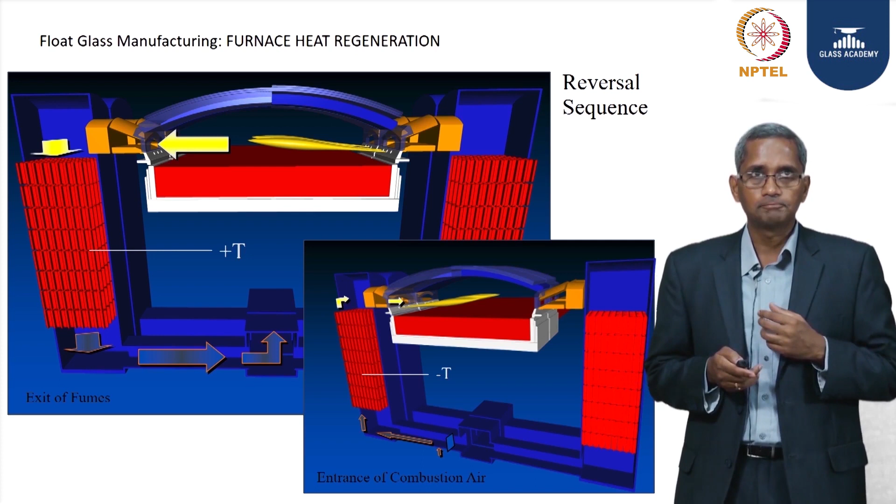This is another picture to clearly understand how the combustion happens. The furnace is the one in the middle. The two towers that you see, right and left, are the regenerators. In this picture, the firing is happening from the right hand side. The flue gas is going through the regenerators, and the waste gas is going out, the reddish color on the left hand side regenerator top. When it goes out into the chimney, the color slowly turns blue, which means the temperatures have gone down to about 400-450 degrees centigrade.

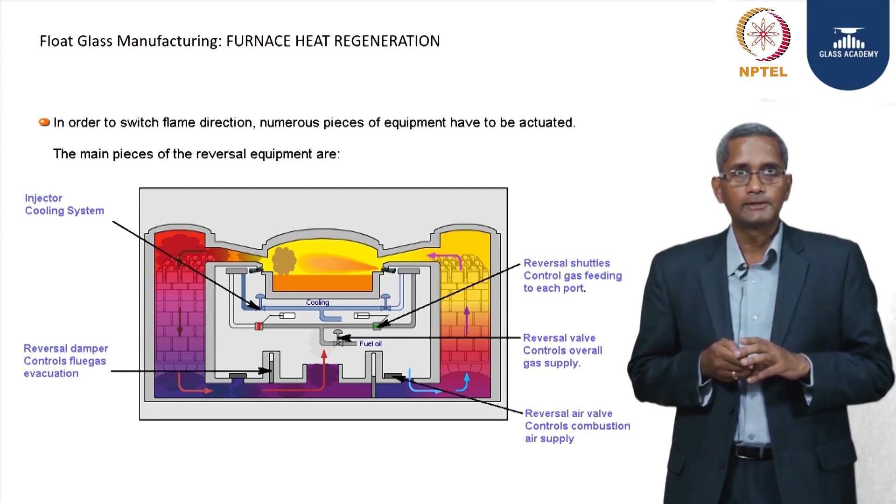Okay, so now having melted the glass efficiently, because we are regenerating the heat, and having homogeneously brought the glass together in the neck, we have reduced the temperature in the working end to 1100 degrees centigrade, and this is a very critical temperature. This is the temperature at which we can form the glass. The forming operation, like in most industries, works on the glass to form it to the shape that we want. In glass manufacturing, we are talking about the width and the thickness. That is formed in the float bath.

In the initial introduction, I talked about the float bath having molten tin. Why molten tin? When Pilkington brothers invented this process in 1957, till then the glass was being drawn vertically up, and the glass was trying to follow gravity and sag, even though you had a good set of rollers on the sides taking the glass vertically up, the Fourcault and Colburn processes since 1913. The optical properties were not as good because the glass tended to sag and become wavy.

And so Pilkington brothers thought, what is the best way to make the glass flat? All of us know the flattest surface we can get on earth is a liquid surface. So they thought, how about two immiscible liquids, like oil on top of water? If the glass can float on top of something molten, then we could set the thickness and width while the glass is floating, and that could give a very flat surface. This idea propelled what we now know as the float glass manufacturing process. They found that it is possible, and for that we need three very important properties for the medium, or rather the substrate, on top of which the molten glass can float.

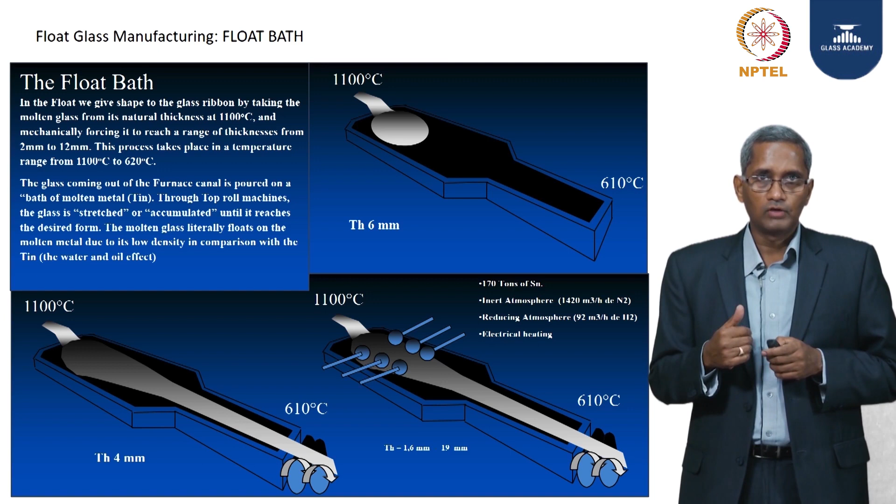And after that, it is a C zone, in which again cold air, a mass quantity of air, is being passed to have a little bit of faster rate of cooling, and in the D zone, it is preheated air, but direct cooling with passing of the air in contact with the glass, not through the ducts as it is done in A, B and C zones. And in F zones, it is done with mass air, cold air directly onto the glass to cool at a faster rate.

Now, let us talk a little bit about what this annealing range of the glass is. The glass that we make, as you saw in the raw materials, is using silica, soda, as well as calcium, magnesium, etc. So, the type of glass that we make comes under the category called soda lime silica glass. For soda lime silica glass, the annealing range is 480 to 540 degrees centigrade, which means above 540 degrees centigrade, the glass is said to be in a plastic state, which means whatever you try to do to the glass, nudge it, poke it, it does not take any stress, because the glass is plastic, it gets back to its original shape.

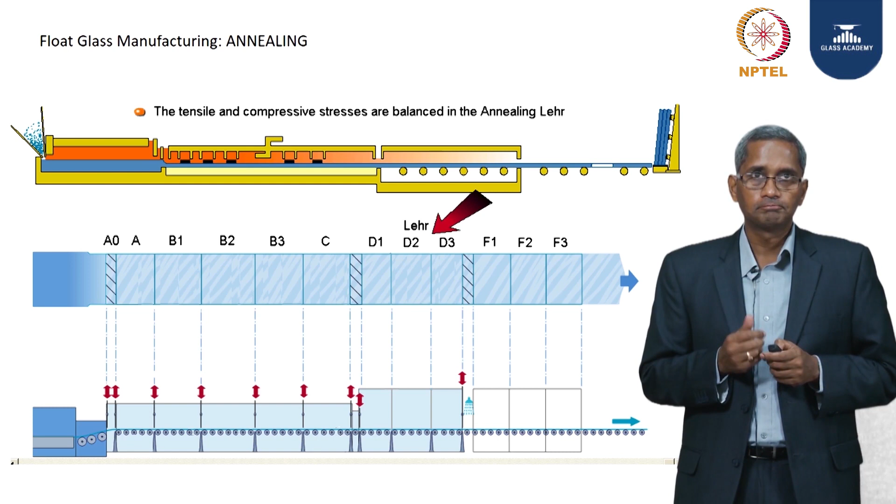And this is done with a very slow rate of cooling using various blowers and different control mechanisms which are inbuilt into the annealing lehr. And now the glass is cooled to a temperature of 60 degrees centigrade. Now it's time to meet the customer's requirement in terms of dimensions as well as other quality.

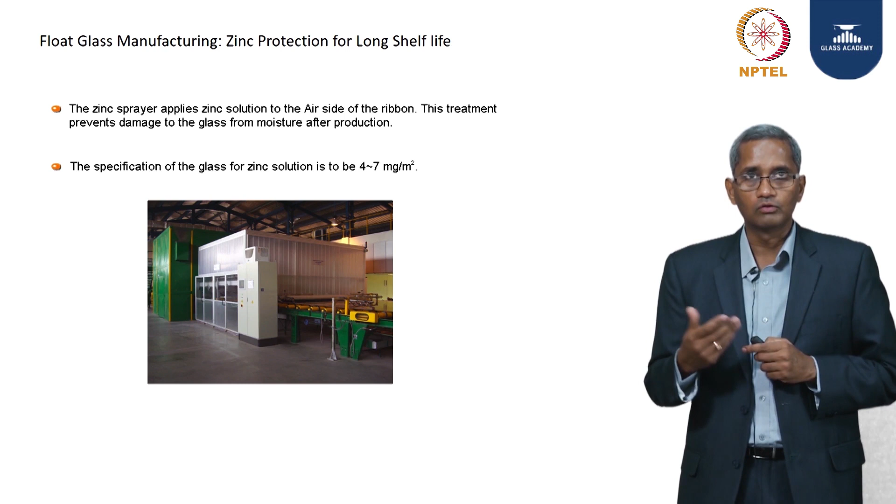For the glass to remain longer in humid conditions, and to avoid the problem of weathering attack, the glass is sprayed with zinc citrate online. So all the glasses that you buy will have a zinc citrate coating, protection against weathering, which can happen because of a humid atmosphere when the glass is stored in the warehouse for a longer time. So this is the process that you see in the picture.

And next, we talked about the stress profile on the annealing lehr, and there are online equipments which measure and tell us continuously how much stress is on the glass, so that we can regulate and avoid bad stress glass being sent to the customer.

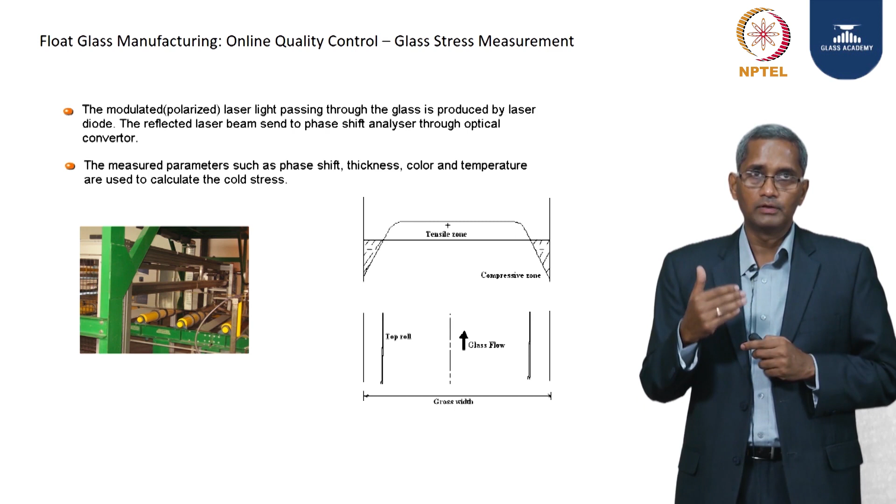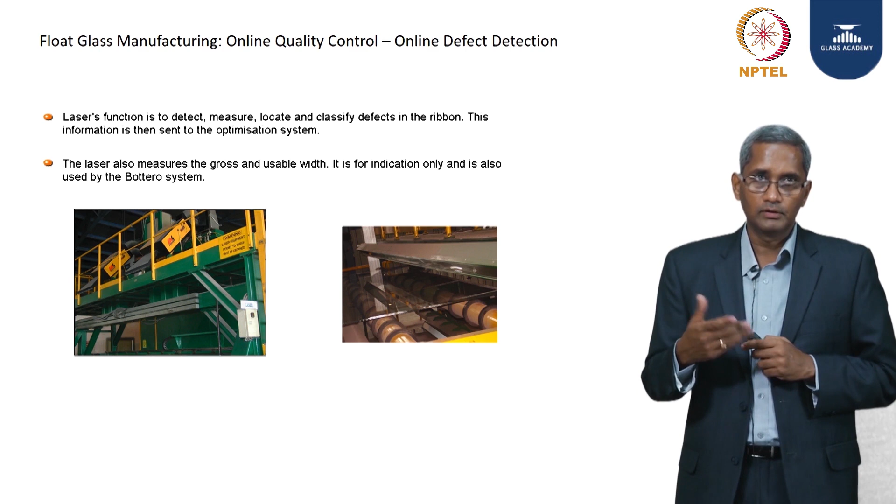Online, all the float lines are also equipped with high-tech detection devices which can spot defects, unmelted raw materials, or bubbles which come because of poor refining. As we talked about, the CO2 has to escape out of the glass; if not done efficiently, it can pass into the glass. Even the defects that we can't see by naked eye, even with good lighting, there are scanners which can tell us where these defects are, and these are scrapped online. That's a detection system.

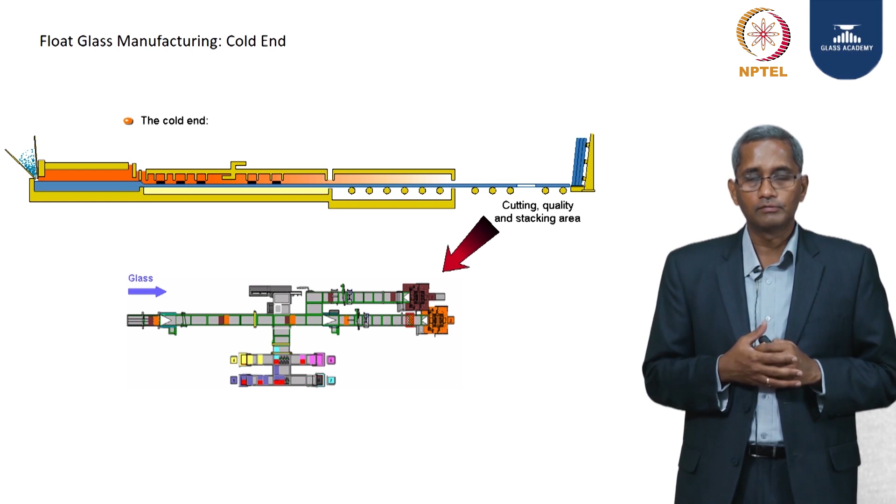Having detected and scrapped all the bad glasses, now the good glass alone travels into the cutting line. The cutting line, depending upon the customer's requirement, has different possibilities to cut. As you can see, you can cut it into a big size glass called a jumbo glass, or into medium sized glasses, called the DLF, or the small standard size, called the SSS. You take it into the stackers and robots.

And just to tell you, when we think of glass manufacturing in a conventional way, we always think that it is a very, very high temperature, with people toiling in a very dusty atmosphere. But technology has facilitated that all the hot end and cold end cutting controls, as well as the furnace operations and float bath operations, are done through distributed control systems. People interactions are minimized. The exposure to heat and dust is absolutely not there.

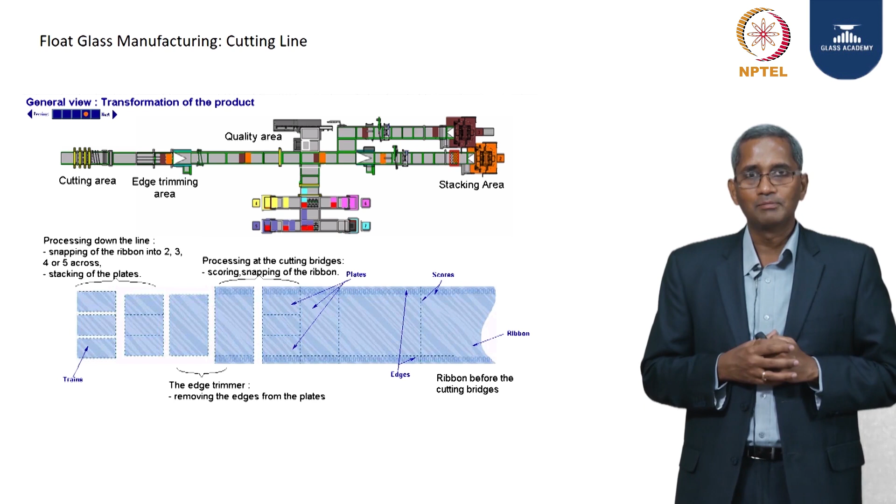And even when you come down into the cutting line to pick the sheets of glass, it's quite like any high technology industry you would see. There are a lot of robots and stackers which pick up the glass without any need for humans to do this activity. So this is the float glass manufacturing process, and I hope you got some information related to what you are looking for. Thanks for watching.